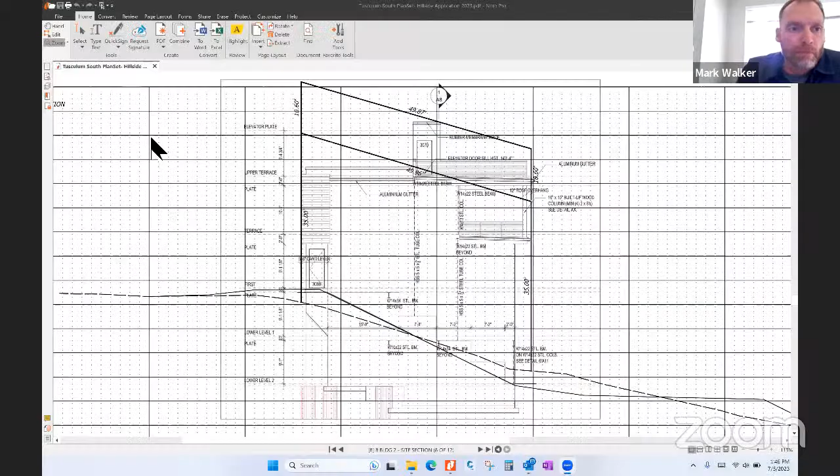Mark, could you pull up the shot of the finished trim for 4189 and 4191? It's a photo taken last week. I will try. You said it was, what was the address? It was an email that I sent with two photos. Front elevation, remember? Yep, that's it, front elevation right there.

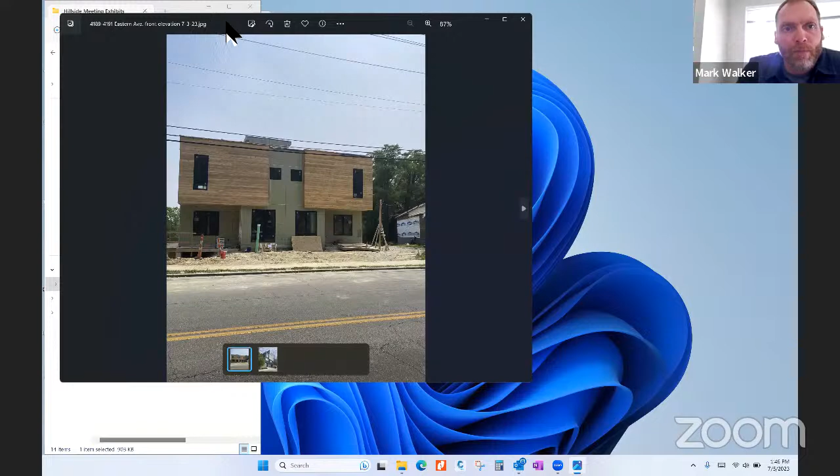Okay, that's perfect. So this, and the photo next to it Mark, is just kind of a shot from more of an angle. But yeah, let's just go back to this one for now. So this is 4189, 4191, which was approved in our first go around with the Planning Commission some two years ago.

I don't want to go on too much of a tangent here with the Planning Commission stuff, but I think I would appreciate some background on what exactly happened with planning, what was approved by planning, and why the rest of these weren't included. We're gonna get into that, I think this will help right now.

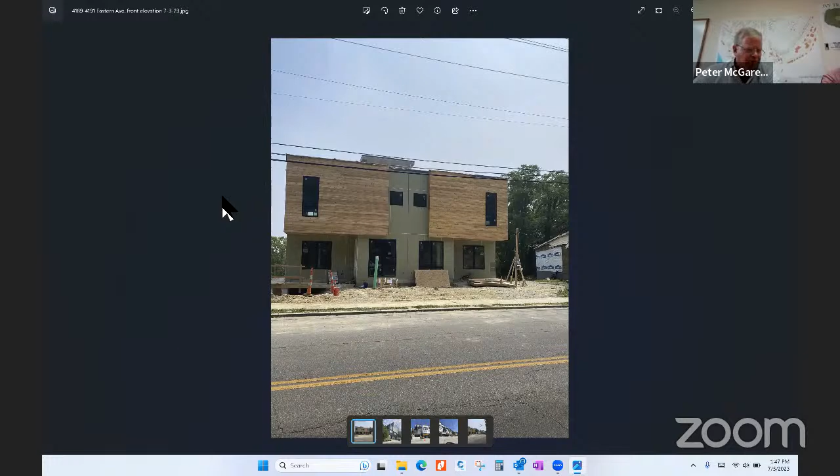So this is the way that the buildings look from the street. You can see we're two stories above the curb. And then if you look at the top, that's the elevator shaft that comes into play, like 30 feet back from the front of the house.

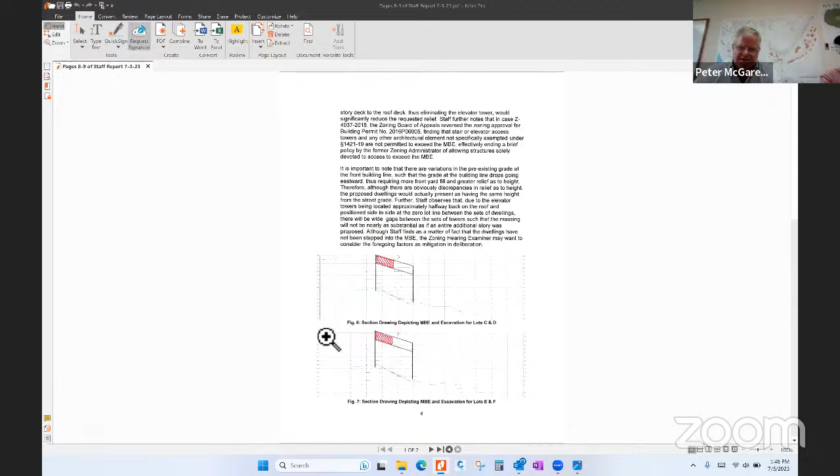So with this, Mark, we have one other, it was my highlighted report from the staff report, pages 8 and 9, with the sections highlighted in red. We can verify this through some means, because it was alluded to in the staff's report, that James Weaver, I believe, talked to zoning about this.

But what happened is I believe that we could have gotten approval for all 12 lots in our last meeting. The area that I have highlighted was the area of contention that the city pointed out. If they gave us approval for buildings A and B, or all the buildings, we could come back and build in that zone that is highlighted out.

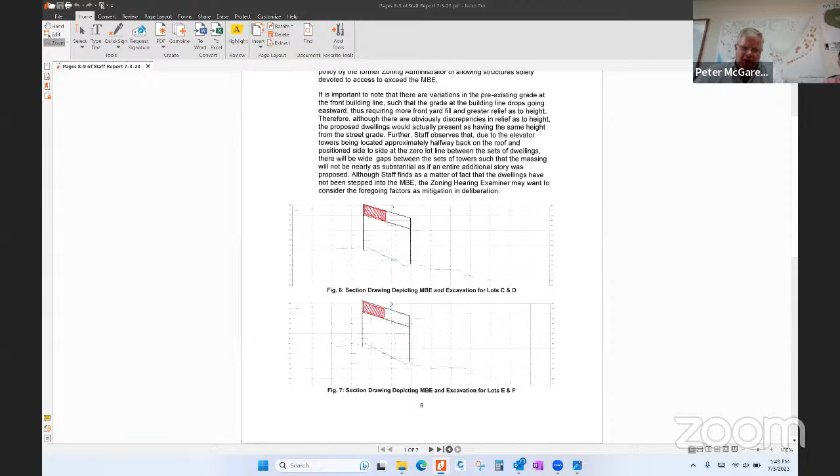And we don't want to build into that zone. We could come up with a simple way that says we're not going to, because if they had approved all of it at the Planning Commission, then we could have applied our next go around with another story out front, which was not our intention. It's just the way that the box is measured, that parallelogram with the city.

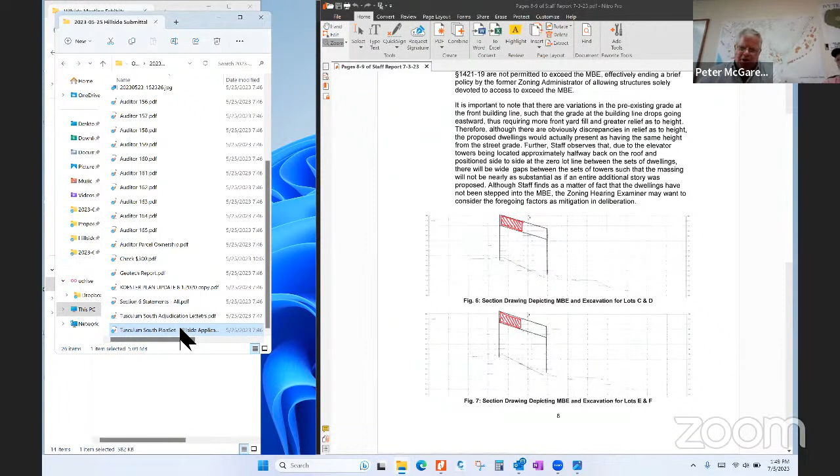So what we were willing to do at the time is say, okay, give us approval for our first building so we can get going, and then we'll come back with some modifications, because we wanted to change the elevations a little bit. But we don't necessarily want to do that anymore, because we can change the materials on the front elevation and come up with a product that fits in with what we're doing.

That's a clear example right there, where we could still put a little gable out front roof without violating that spot that I have highlighted for the one. Well, that's what I'm saying, Joe, is that we could put something a little more robust, but we really like the way this building is turning out.

So we did not plan, and we're willing to tell the city we will not, under this approval, if we were fortunate enough to get that today, build in that zone unless us or another builder came in and made a whole application to get into that zone.

Now, I know that one of the city's challenges also was what we own. We have a 53 lot subdivision right across the street now that is at the real estate department.

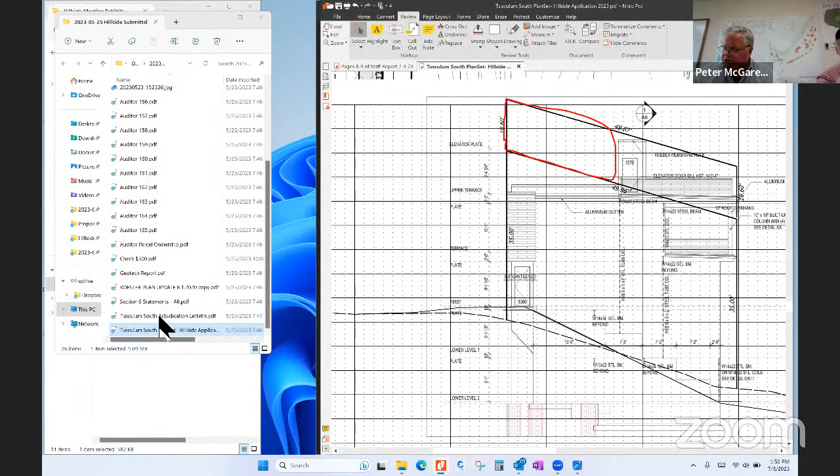And Mark, let's throw up that diagram that you did to show the sections from Tusculum Ridge South to Tusculum Ridge North, because the city rightfully is concerned about what happens above the street. And we happen to control it.

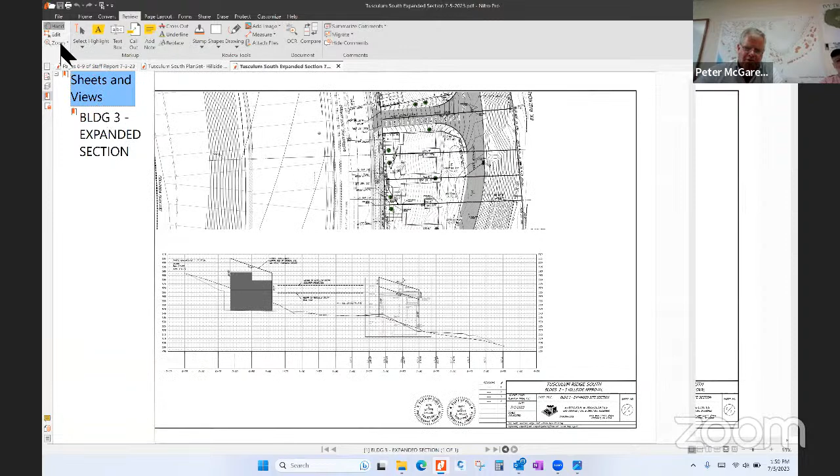What this shows is a section of Tusculum Ridge South, which is to the right, and Tusculum Ridge North proposed, which is up there. Because of the way this parallelogram is figured, we wouldn't need a variance for the height on these ones up there. And we still see out over the top of the houses down below.

Now the grade on this site, it's an enormous site. It's 53 lots wide. The grade changes, fluctuates up and down a little bit. But overall, I know the staff rightfully has a big concern about what we will be coming to ask for up above.

At this point we have a plan designed. It's a great plan with 3 different elevations. We can change the facades. We're planning on doing the same thing over and over again, going down the street on 35-foot lots, with limited curb cuts again.

How many curb cuts on that 53 lot, Mark? I think it's 4. So for 53 houses, we have, at the city's request on the high side also, just 4 access points where people can drive off of Eastern Avenue, get out of traffic, drive along a private drive in front of the houses, and into their individual garages.

Mark, do you have an elevation that you can just pull up of those, just to finalize? Of which one? The Tusculum Ridge North plan. I thought I sent those out this morning. Oh, did you have that? Yeah. Oh, you can pull up the 53 lot.

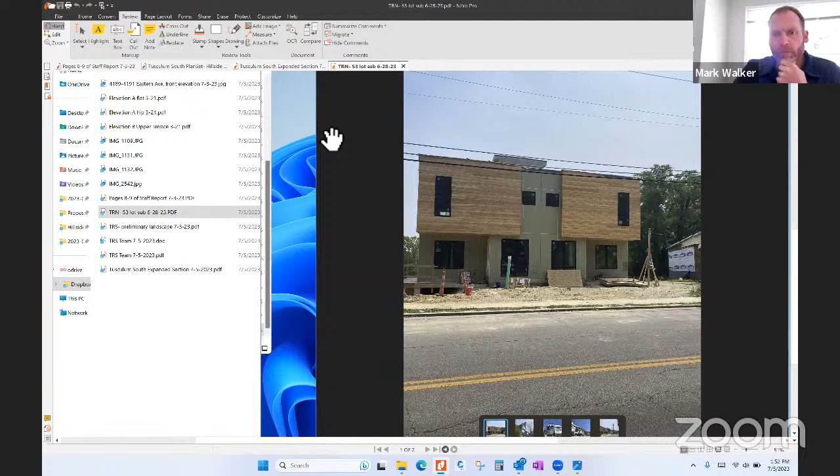That's a good example. So recently we picked up another piece of property which allowed us to tie in. We had almost 42, now we have 53. This is just across the street from this site, and obviously many other sites going along the way.

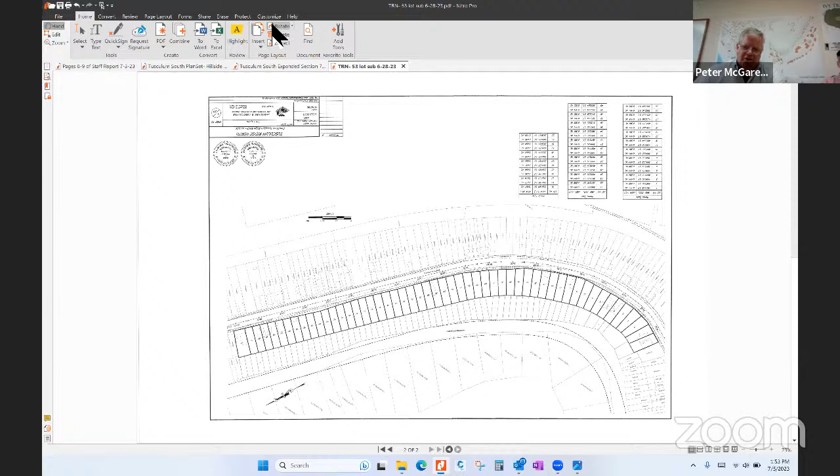This is one that we would, we'll go through the same process. This one, obviously, we go through the planning commission first with Hillside. It is Hillside. But we've got, like Shegan and Steve have talked to, robust foundations and retaining walls designed to hold the upper portion of the hill, which is the city's baby Columbia Parkway. So we won't be messing with Columbia Parkway.

We've been in meetings with the city on how to stage our development. So if we're not going to cut all 53 lots out at once, if we're going to build 12, we'll put in the tangent wall, which is piers drilled into bedrock that'll be behind the houses prior to us doing any excavation other than to get up to put the pier wall in. So that will allow us to put these houses in behind that.

I don't want to get too far off on Tusculum Ridge North because we're going to go through this whole process, but we are coordinating with the same team, and we're working with the city geotechs. We're working with the building department, going through coordinated site reviews, which are very detailed, so that we can make sure we don't mess with the baby Columbia Parkway like has happened in other sites in the city.

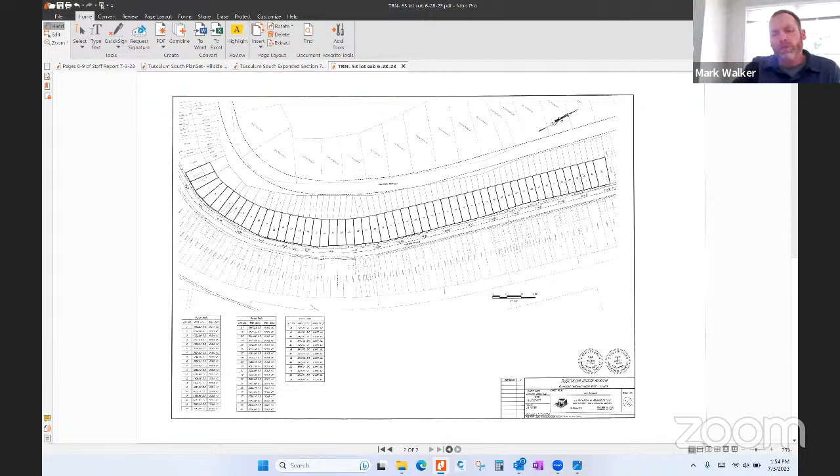Did you find those plans yet, Mark? Which ones are you looking for? The Tusculum Ridge plans, the Tusculum Ridge North. Tusculum Ridge North, okay, yeah, the preliminary. It should say preliminary plans in one of those emails. I've got them from when I sent them to you, I can pull them up real quick.

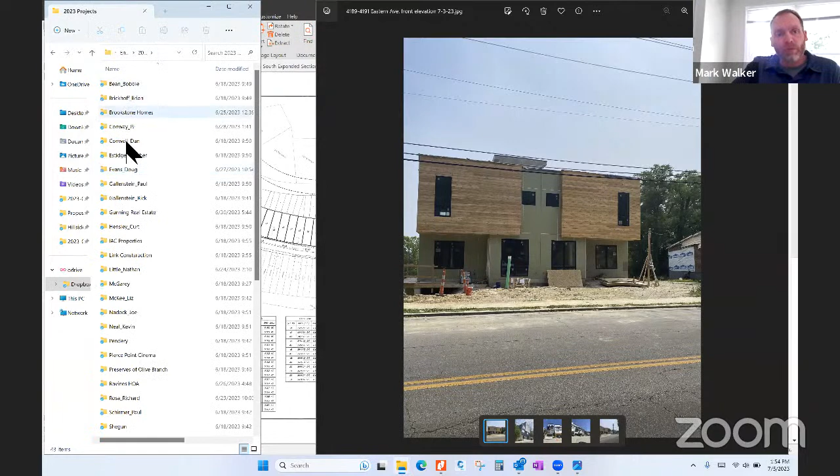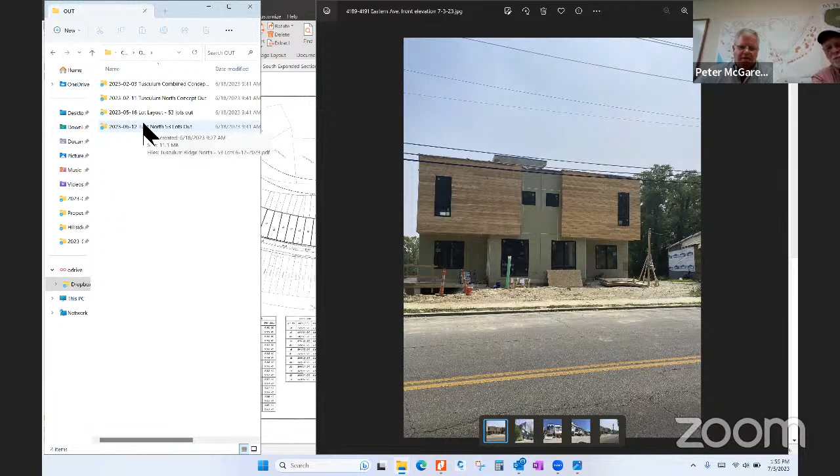Okay, this is Joe McGarey. Part of the question in some of the review was the elevator shafts. Would they be blocking any of the views from the Tusculum North site? As you can see from the elevation up there, those elevators sit back. They're relatively a small area compared to the overall building, and realizing the next building is 10 feet away, plus that distance to the elevator shaft, so it's very open as far as the views.

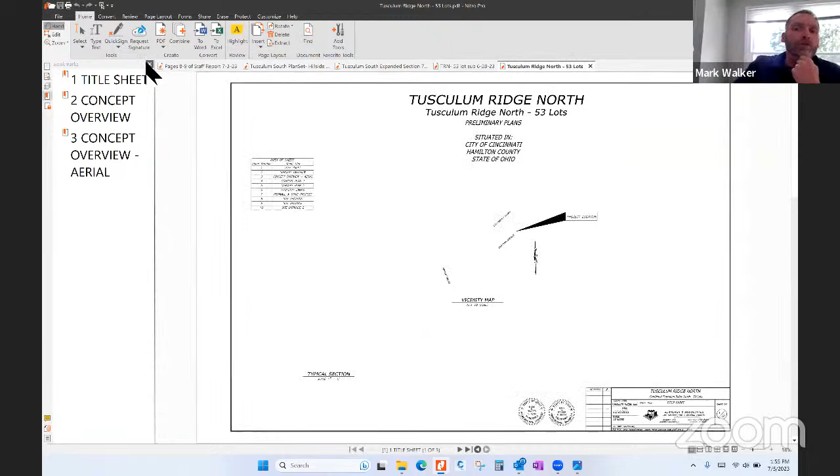So those elevator shafts are really not going to come into play as far as blocking any major views. Peter, are you talking about the architectural drawings? The preliminary, you know, with the dog and the people walking by. Okay, the little rendered elevation, yeah, okay.

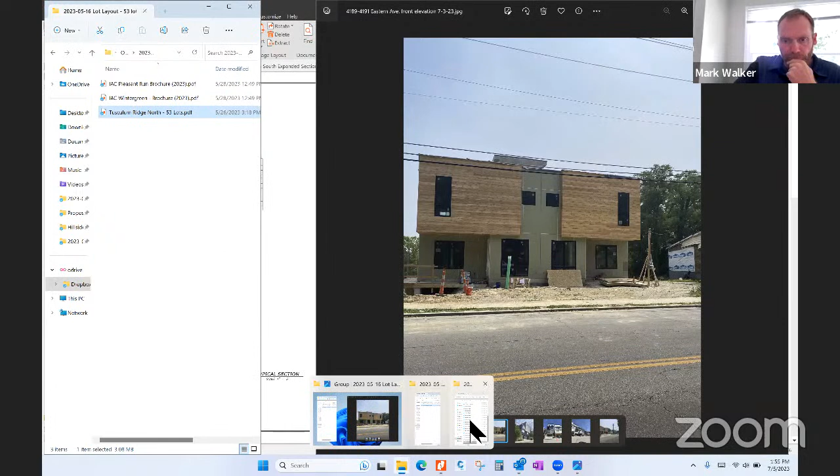I think it's important enough to show that this is both sides of the street. We're trying to come up with a structure that's going to fit in with what we're doing.

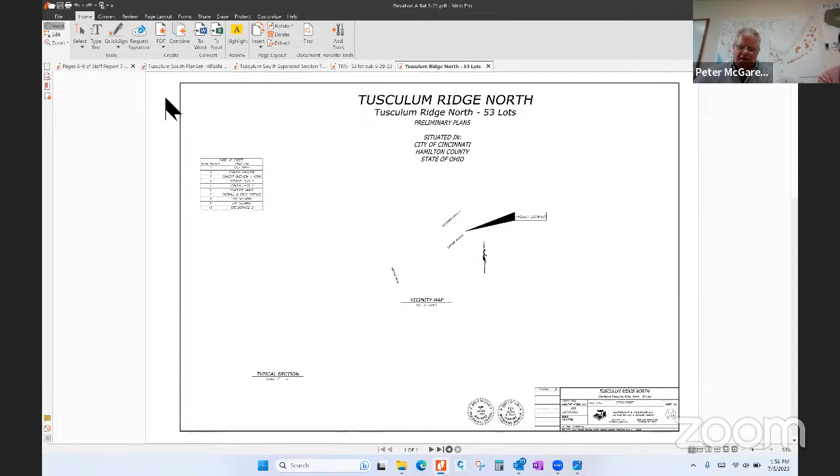All right, so Mark, I'm going to move on. It came down to, in the planning commission meeting, I believe it was either James Weaver or Trey who brought up that if they are approved, that would be giving us approval to be doing stuff in that zone that I put a red bar there. That's it right there. So this is a hip elevation or flat roof elevation.

Mark, you got another one? Yep.

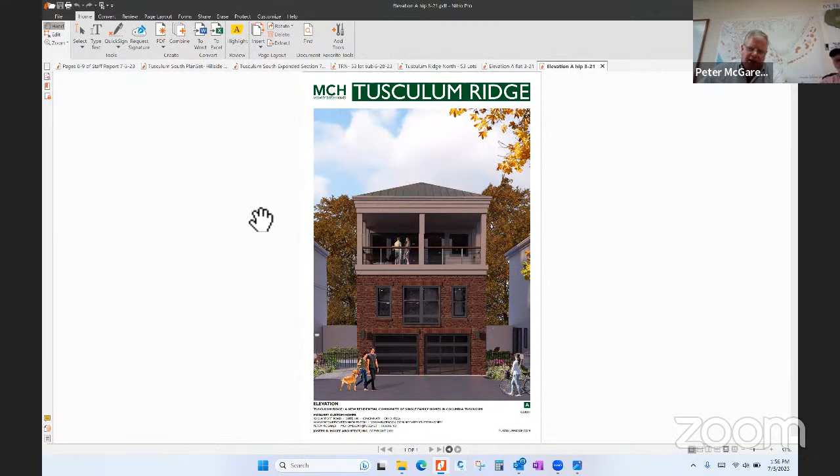This is the hip elevation, and these are on 35-foot lots. We still have, if you look behind the houses on the 10-foot between them, we are linking each foundation on this on the high side also. That's a concrete wall behind, which allows us to create one solid bearing wall.

And then you have the taller elevation, Mark, which has the upper terrace. No, not that one. That one.

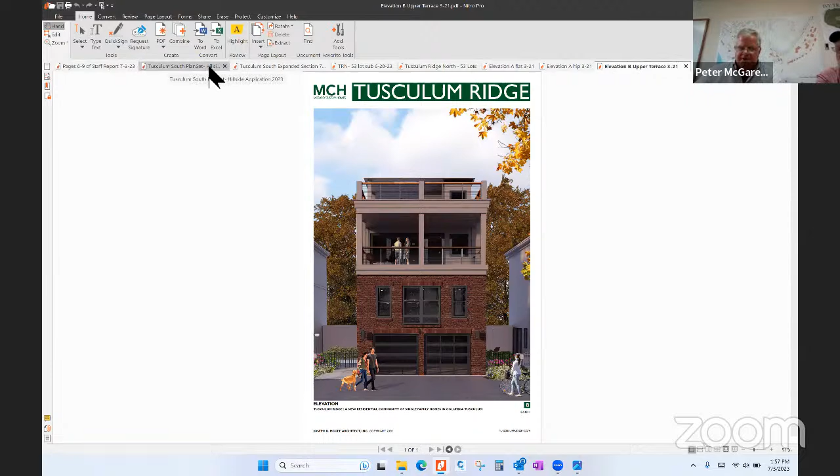Okay, so that one has an upper terrace where again we set the building, the space back towards the back of the house on the upper floor to work within the city's parallelogram, which is the one that Mark showed you that he did this morning. The cross section is based on this elevation, working within the city's framework. We're not going any taller than this.

So that is that elevation, shaded, working in conjunction with our view and line of sights with the stuff that's on the low side.

A wonderful house, the first thing on Eastern Avenue, this section of Eastern Avenue between Airport Road and Terry Turf Club. It's new, and probably the newest in 120 years on Eastern Avenue. We're going to be here for 5 or 6 years. We don't mind going through the processes.

We've talked with some of the city staff about once we go through the process on the high side and low side, maybe we can form the rules that say, if we follow those rules, we can do the same thing over again under the direction of the city, the geotechnical staff, and the structural engineer staff. That's what we're trying to do.

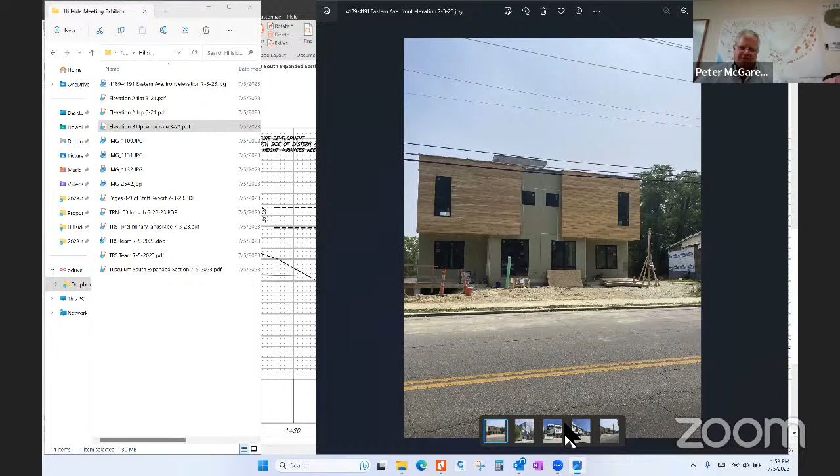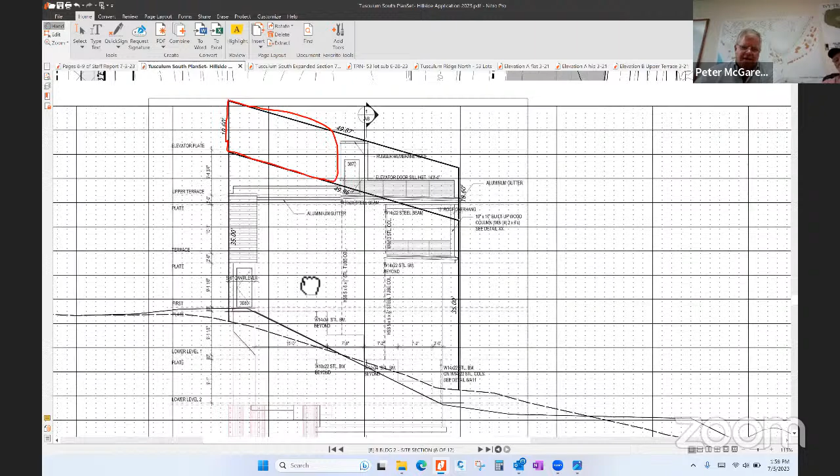And then we would have, Mark, can you pull up a section just showing the overall development, the 12 lots with the driveway? You might not show the 6 buildings, but yeah, it's the first sheet of that plan, I think. Yeah, second sheet. Okay, so that one's fine, Mark.

So this shows the driveway in between. To the far left is a building that is almost finished, under construction. That's the first one, and we're going to build these in order.

So the next one, building 2, is the one that we will make application for just as soon as we can get through the approval process to build that one. And then hopefully by January or so, we'll build the other one and finish that side of the street. Then next year, we would build the other 3 buildings out, depending on velocity of sales.

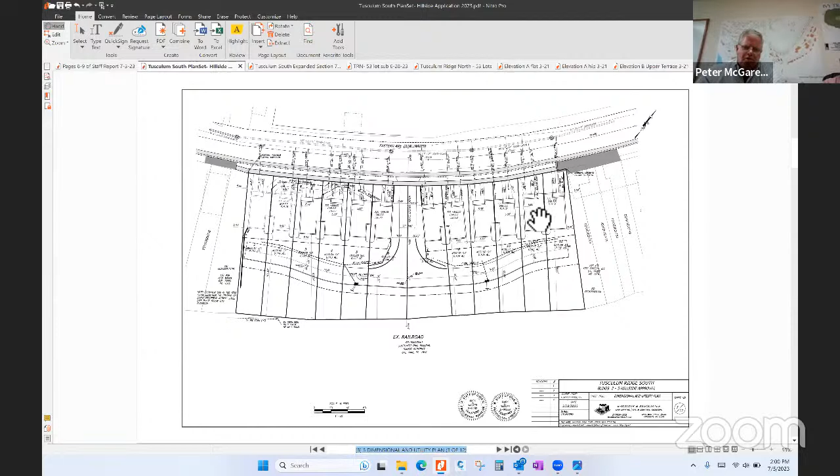Mark, there's one more thing that I'd like you to show, unless anyone has any questions about that. So these units are all meant to work together to hold the hillside. So the holding force is all 3 buildings bonded together with piers, buttress walls, and as Steve would say, a robust foundation.

Mark, one other thing, can you pull up Gail's landscape plan? It kind of shows a little different. Those were part of the emails that I sent this morning.

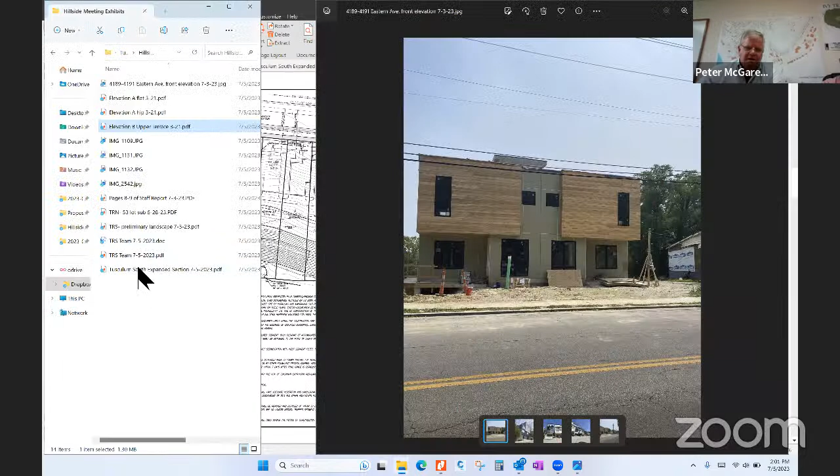Yeah, there you go. No, one down. You had it. That's not it.

There you go. So this depicts the site overall a little better. With that retaining wall that links the buildings, we end up with space between the buildings that'll be landscaped, lawn area, a fence out front, a lot like they've done on Riverside Drive with some of the developments there. We're going to pull the same type of theme going down the street. It's a 5 to 7 year project for us. That's why we had to go back again with the same elevations, the same foundation, the same technical crew that we use to get this stuff done.

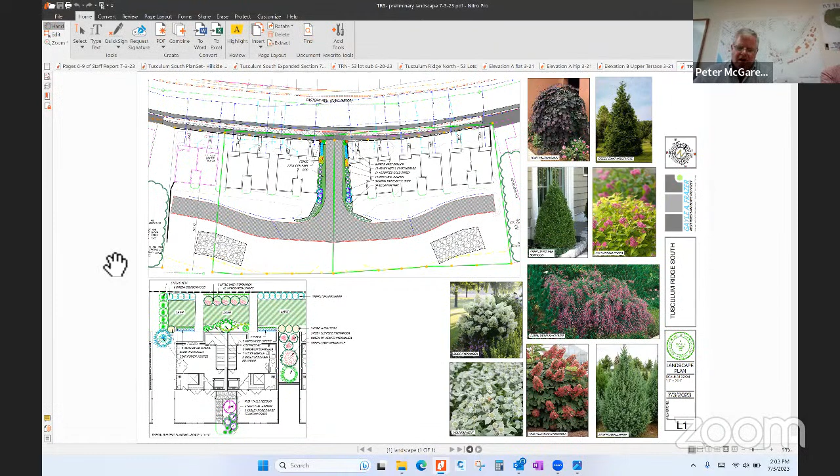Yeah, we've got some interior stuff that we're working on that is just improvements of where we have a hall and a couple of things like that. But the exterior, we might be changing some exterior elements to make them a little different from the building next door, but the height exactly the same.

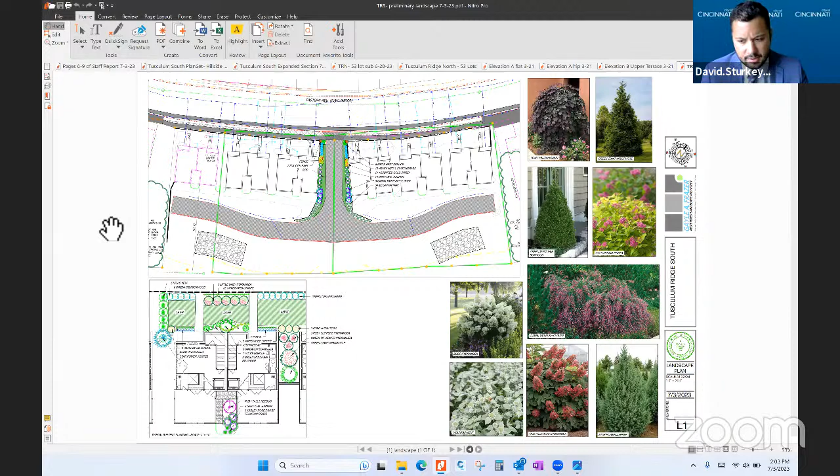Okay. And Peter, could you dig in a little bit more on your initial comments about why you believe the height variance is necessary? I think you were referencing existing grade versus what the grade is now. Could you talk some more about that?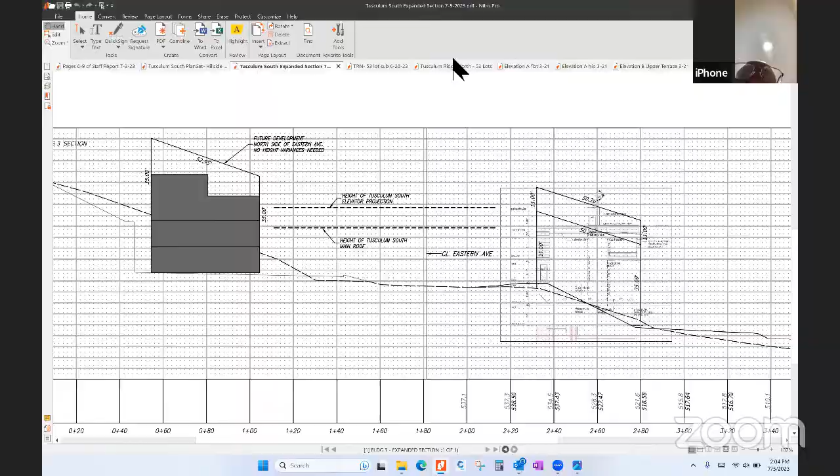Mark, I can't hear you for some reason. Doesn't look like you're muted, but I cannot hear you. Can anyone else hear Mark? No, he's not speaking. Still no. Mark, maybe check your audio settings, the microphone may have switched somehow when you were sharing your screen. Yeah, good point.

If we go to page 8 and 9 of the city staff report, I might be able to help with that while we're waiting on Mark. Sure. Or Joe, our architect, is right here. Let's wait until they pull up this report.

Part of the conditions on the existing site is that to the east of this site, the contours are lower than they are at the building we're doing right now. So when you take the parallelogram and put it at the existing grade, our buildings appear higher because they will all be the same elevation at the street, even though the grades on the last lots, 11 and 12, are lower. This makes our building appear to be violating the height restrictions at a greater distance. According to how the parallelogram is constructed, it does, but in actuality, the photograph we showed you of the existing building will be the same all the way down the street. So the height will be the actual height of the second story, and the elevator will be no different from the first building to the last building in relationship to Eastern Avenue.

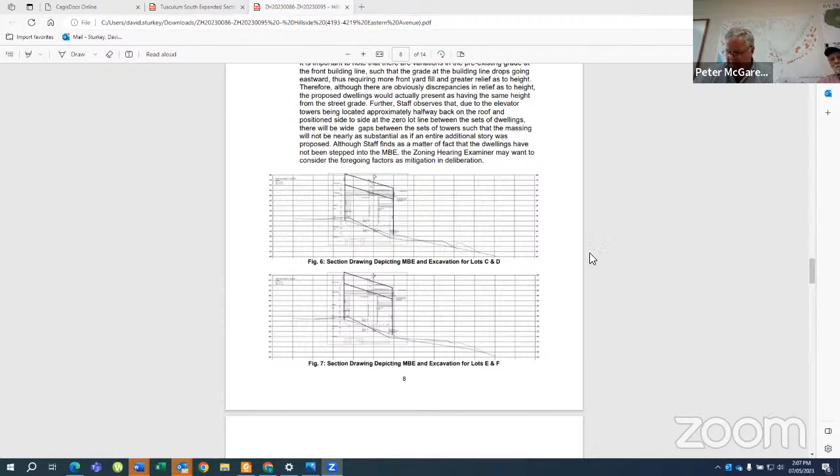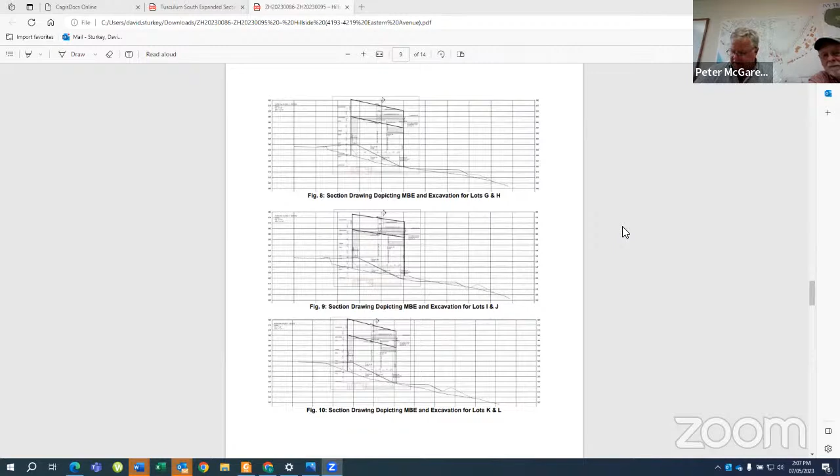Okay, does that follow? Yeah, I think so. Here, on these other lots, you can see that bold line comes down deeper, well below the curb, because that's where the existing grade is. Even though the existing grade is going to be coming up 8 more feet or whatever that is, I can't read it, to finish grade.

So the buildings are no taller out of the ground when they're finished than the first one is, which was approved with a slight, a few feet variance, I believe. I don't think so. Gotcha. Okay, so are you saying, our original building?

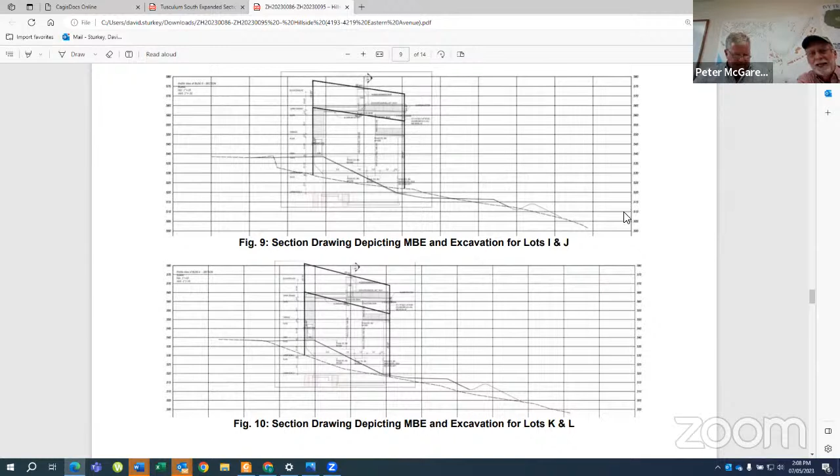So we're already at a 6 or 8 foot loss in height, even though our first floor is going to maintain at the same point. So in real life, every building down through there is going to be at the same height from the street. Yeah, so you don't have to walk down steps to get to your front door. You're going to walk across a relatively flat front yard to your front porch and then go into your house. They'll all have the same basic feel going along there.

So in other words, the height variance is distorted because of the existing grades and how that is calculated. In actuality, when those products are finished, they are going to be basically the same height off the street all the way down through. The appearance will be exactly the same.

If we were to follow and not ask for a variance on those last lots, you would actually walk down to the front door from the street. That's what we're obviously trying to avoid, with the fact that we put in a driveway to the rear based upon grades and everything, so that those elevations back there are kind of preset for the garages. So the foundation heights and different things have all gone together to determine where we set these houses at.

Well, let's talk a little bit about why the elevator shaft that we proposed is what we feel is necessary for this market and for these houses. These are all LEED houses. We put geothermal in all the houses, even though the tax abatement credits are not going to be what they were. We will still be building green.

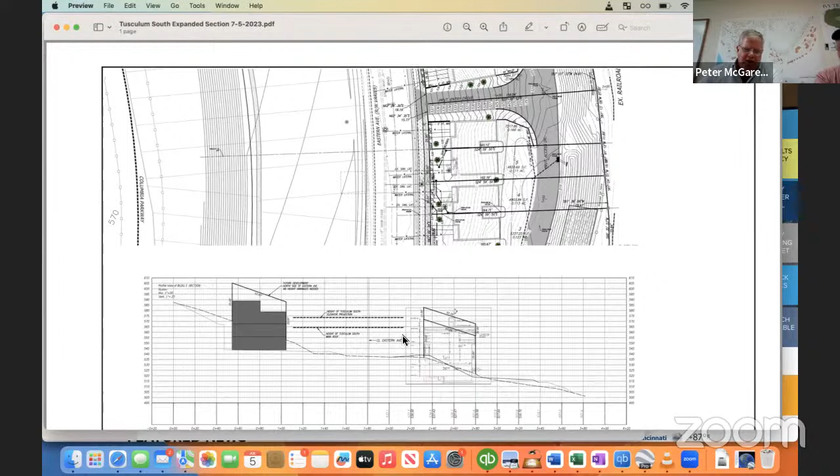So real quickly, the shaded area, Trey, on the Tusculum North—that's not necessarily stepping. We do have a retaining wall system that we've worked with the city and our geotech on. Mark, could you just show where that wall is behind the foundation? Yes, you can just show it on the shaded area. There's a wall that sits right here, and that goes down quite a bit into bedrock—about 20 feet. The wall height is about 20 feet on average.

So we're not necessarily stepping it into the foundation there. We are, yeah. And pier again—this is a future plan for Tusculum North, which has not gone through any of the permitting process yet. I'm sorry, I was trying to answer Trey's question about stepping. We're not necessarily stepping this because we had to push the buildings back so that we didn't have all these curb cuts—53 curb cuts along Eastern. When we push them back, it gets into the hillside, so we put in another retaining wall system to build these without a problem.

But the part I was actually referring to is elevation, stepping the elevation. The way you do that is more typical of what we've seen in hillsides on other projects. Trey, are you saying when you say elevation, you mean step from building to building, they change height a little bit? No, from front to back—this is shown to be stepped down. That's what I think he's saying. Well, why don't we ask Trey what he's saying? Yeah, that's what I'm saying.

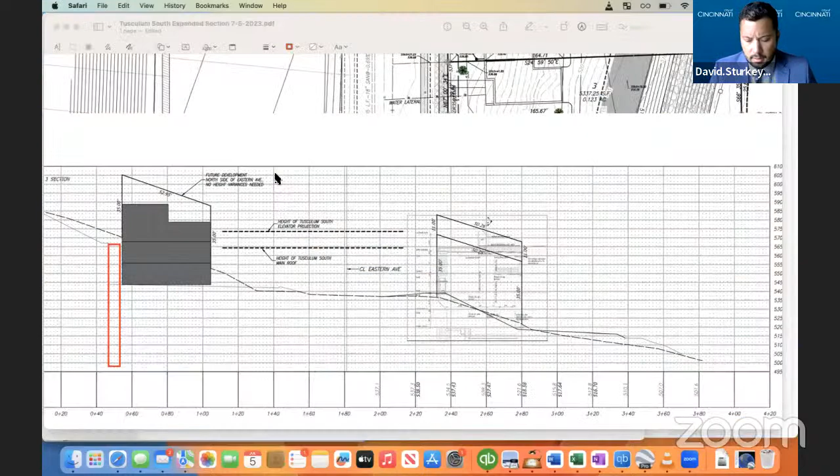I would like to show one other demonstration. Mark, you had a set of photos I sent with existing jobs we've done and other jobs like for Homerama. Peter, just to be clear, none of the documents you attempted to send out this morning changed or updated the design or plans from the original application material - is that correct? That's correct. These are just supplemental demonstrative docs - we've not asked for anything additional.

This is a house we built on Bull Street, and it's 1, 2, 3, 4 stories. We didn't put an upper terrace on this one because they did solar and geothermal on this particular house. Go to another one, Mark.

These are ones that are not Homerama, but right below Homerama. The rears of the houses where they're 1, 2, 3, 4, and somehow the upper terrace makes 5 stories on them. They're very similar to ours out front, where they have 2 or 3 stories in front but 4 or 5 stories in the back. Let's go to another one, Mark.

These are the same, going down the street. I didn't show the Homeramas because I didn't have any current photos of them. Let's go to another one.

That's us. This is interesting because you can see the old ranch next to ours here. Eastern Avenue has a lot of very old housing stock that will be replaced over the next 5 to 20 years. Let's go to the next one, Mark.